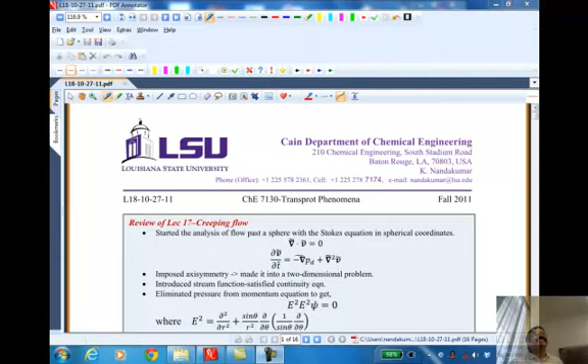So how was the last assignment? Was it brutal? Jeez. How? Is that bad? Yeah, I think we had 2 tests and I did really. I know it's no good excuse, but I couldn't think straight. Okay. How did the others feel? Was it brutal? It was trying to figure out what we needed to use. Yeah, kind of. More than anything.

It's basically what I'm trying to do, if you notice in the assignments, is make you go through the exercise that we cover in the class. The concepts are basically the same, but I switched the geometry. If we did the flat plate in the class, you do the cylindrical one. If we did the cylindrical one, you do the flat plate. Right? So the steps are basically the same, but you need to work through the math once.

I'm particularly worried about the last lecture because there was a lot of math in there. There's also another side.

Wow. Can you read that? Can somebody turn the light off? I think we should get started. Thank you. Oh, yeah, that's great.

So, I don't know, is it the comfort of having the recorded lecture? I see that there are more absences now. Some people are skipping because of a test next. Yeah. Like, they're worried about it for whatever reason and skipping the class. Don't know why. Okay. I should start, well, I mentally note down who is absent.

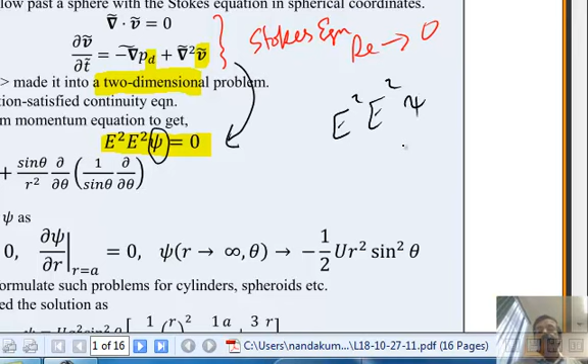So we've seen the physical meaning for the stream function, and you should know, for example, what do we mean by this E squared E squared psi? Okay, how do you calculate that? So it's basically the same operator that is defined here operated twice on that variable psi. So that gives you effectively a 4th order partial differential equation.

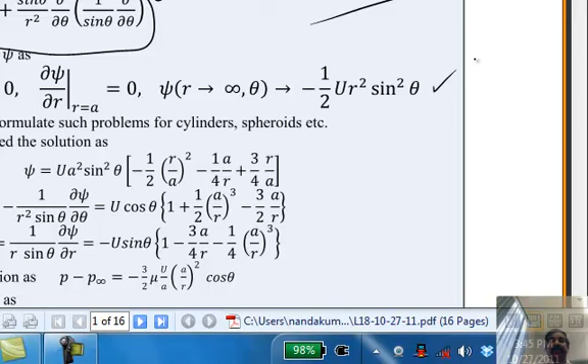And then we said we need to convert the boundary conditions from velocities into stream function. We saw how to do that at both the surface of the sphere and far away from the sphere. And in the theta direction, we really didn't worry about specifying boundary conditions because of the symmetry in the problem. So from sine squared theta, we know that it's axisymmetric, and so we can construct a solution of the form that has sine squared in it and then some unknown function in the radial position. And we solve for that unknown function and obtain this profile.

So there is again a fairly tedious step involved in getting the solution to this differential equation in this form, applying the boundary condition. Now that is a solution for psi, the stream function, but of course psi is related to the velocities by definition. So once I know psi, I can calculate Vr, which is what this is. And once I know psi, again, I can calculate V theta from that definition, and that's what that is.

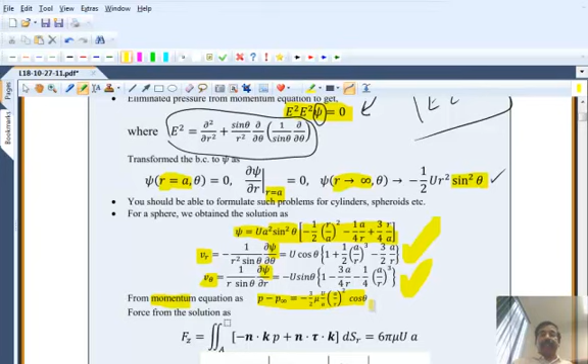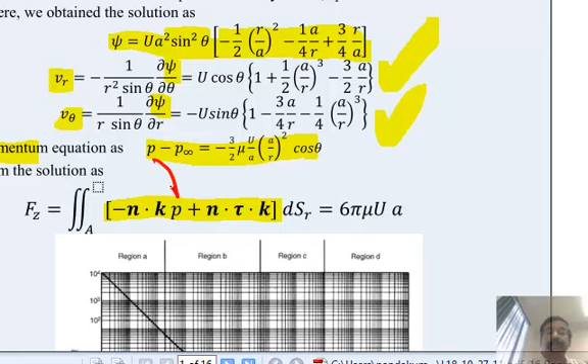Then we take these velocities and put them into the momentum equation and get the pressure profile. So this is a pressure profile over the entire domain from r equal to a to r equal to infinity, in theta direction as well. And finally, the other major step is getting the drag force by plugging in this pressure profile here and then these velocity profiles into the shear stress expression. Okay, and then dotting it with n, where n is the normal to the surface. And then dotting it with k to get the kth component, that is the component of the drag in the direction of the flow.

Okay, and that turns out to be this very familiar 6 pi mu U a. So, the next assignment that I'm going to give you is going to be something like this, which may be a fluid sphere, so that you work through all the steps. And I want you to do that. That's an opportunity for you to work through it on your own, filling in all the steps. Just replace the solid sphere with the fluid sphere. And of course, this expression will be different. It will involve the viscosities of both fluids, the fluid sphere and then the fluid that is surrounding it.

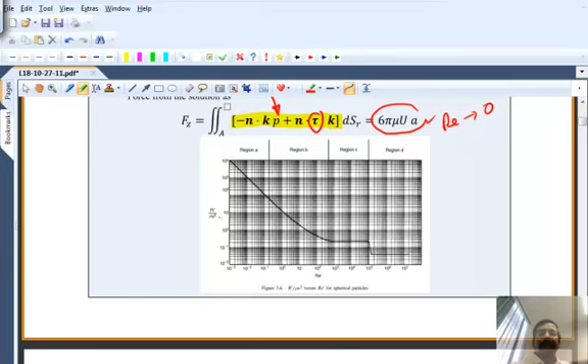Now, in the last lecture, I also pointed out that this is valid only in the limit of Re going to 0. So when you plot it as a drag coefficient against Reynolds number, you will find that the curve follows up to about a Reynolds number of 0.1. Beyond that, you will begin to see the deviation from that. The reason for that is the assumptions that we made about the solution, that it is low Reynolds number, is not valid. So by the time Reynolds number is about 1, you'll begin to see differences from this expression that CD equals 24 over Re. So what happens in reality as you increase the Reynolds number? What do you think would happen?

As I increase the Reynolds number, the inertial terms will become more important. That's a term that we have neglected from the Navier-Stokes equation. And before the days of computers, in the 50s, people have tried to develop an analytical method for getting corrections to the Stokes solution. So take Stokes solution as the basis and see whether you can find corrections to account for the effect of inertia. So we're going to look at some of those methods today. Okay, so any questions on that last lecture? I guess with an exam coming, you probably haven't had a chance to review that.

I have a question. Yeah. So when you find the stream function psi, can we apply that definition to any two-dimensional flow? Yes, any two-dimensional flow, you can define a stream function, and that will automatically satisfy the continuity equation. That is the main reason for defining the stream function, so that you don't have to worry about solving the continuity equation, because the stream function by definition will satisfy the continuity equation. So for any two-dimensional flow, you should be able to do that.

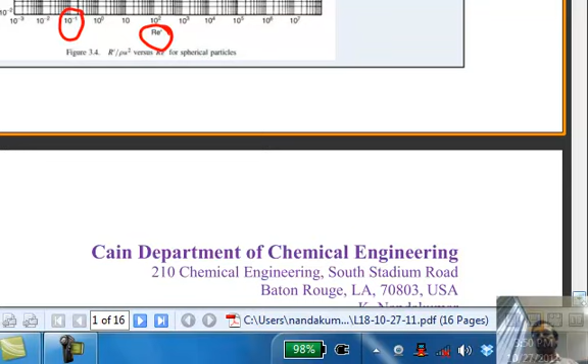Yeah. Now, the appendix in Happel and Brenner has these definitions for various coordinate systems. We have seen Cartesian and we have seen spherical. We will see today cylindrical one as well. And then there are other coordinate systems, ellipsoidal, spheroidal coordinates, and those definitions are given in Happel and Brenner. That's a good source for curvilinear coordinate systems in general, and these definitions for stream functions, stresses, surface areas, etc. Okay. Any other questions?

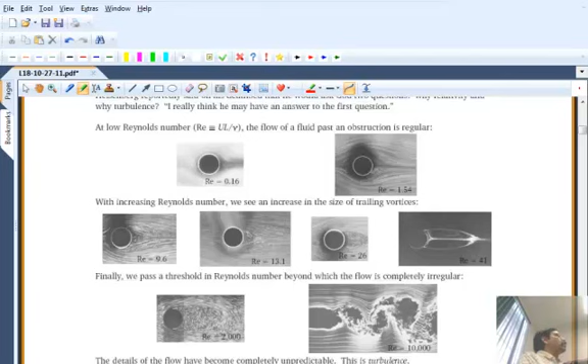So what happens as the Reynolds number increases? So this is a series of pictures that I took from a beautiful book called Album of Fluid Motion by Van Dyke, a Stanford University professor in mechanics. So he collected photographs from different researchers, and assembled it into a small book, only with pictures. And this sequence of pictures tells us what happens to the flow as we increase the Reynolds number. Okay? We are going to increase the Reynolds number by simply increasing this approach velocity U. So in the first case, you have a Reynolds number of 0.16.

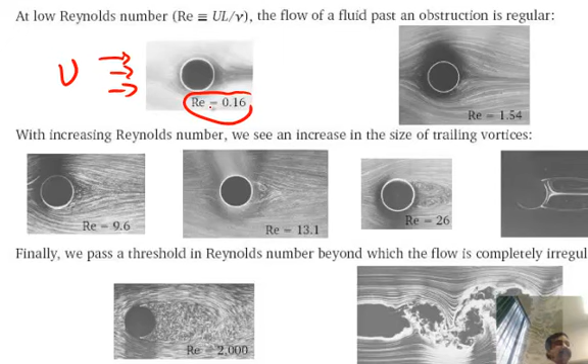And the way that we visualize these is you have a sphere that is fixed, and you have fluid that is flowing past it, and you disperse finely dispersed particles, aluminum dust, for example, 2 micron, 3 micron size, so that they don't settle out. They follow the path of the fluid pretty accurately. Then the reflected light will enable us to see. And you can see even at a Reynolds number of 1.5, the flow is pretty uniform. These are the streamlines that you would see here. Okay, and at 9.6, there you begin to see something funny happening at the back.

Okay, but clearly when you go to 26, you do see this. That's called a wake, and that means there is a recirculation there. The streamline comes and separates from the solid line. So in the previous case, if you remember, the zero streamline is this. So a streamline that is close to it will just follow the path and then come back and hug behind and then continue like this. Whereas when the inertia becomes dominant, the fluid particle that is coming around will start leaving that. So the streamline will actually be now like this.

Those are all zero streamlines. So the streamline that is slightly away just separates from the sphere. So there is a separation point that you will see here. There are two separation points in that cut. Actually, separation would be a kind of a circular projection on the rear of the sphere.

And these eddies, this particular photo is very nice at 41, stretch in length. As the inertia becomes larger, the eddy length increases. The question is, can we predict all these from the Navier-Stokes equation? Not the Stokes equation, because the Stokes equation won't be applicable for a Reynolds number of 41, but the Navier-Stokes equation. Today the answer is yes, we can just go to COMSOL and set up the problem, and it will give you exactly the same picture that you see here.

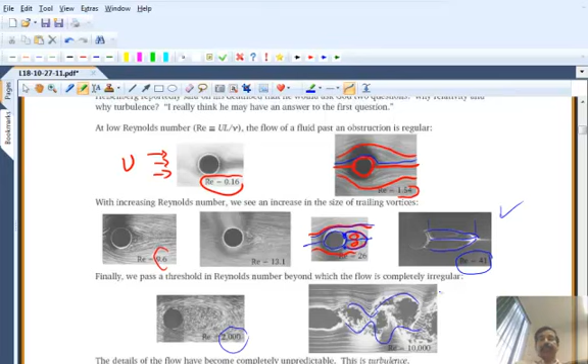And so the question is, can we try to extend the Stokes solution at least to somewhat higher values of Reynolds number? And the answer is, it's very difficult without computers. That's why computational fluid dynamics emerged as a way to address these questions, using computers to solve the Navier-Stokes equation. Yeah? In the last picture, where is this obstruction?

The obstruction here is basically the dark object that you see there. So it's some sort of an ellipsoidal object. Any object that you place in the path of a flow will cause these kinds of separations and wakes, whether it is a sphere or a cylinder or a cube or whatever. And the literature is full of these problems.

People have studied them experimentally using laser Doppler anemometers and numerically using CFD as a tool. But we are going to see analytically what happens. Next year, when I'm teaching a course on computational transport phenomena, I will emphasize more the computational parts. But here we are just looking at the analytical ways as much as possible. So I've told you what is possible with COMSOL, but we won't delve into that anymore.

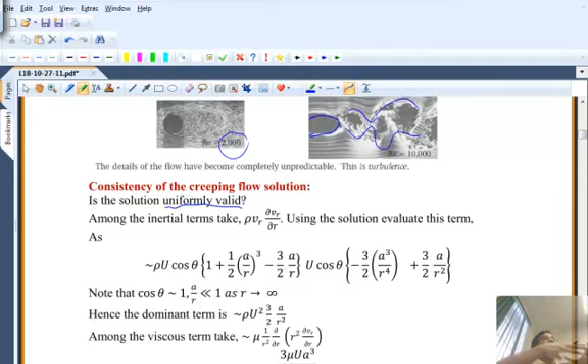So one of the first things that we need to do is examine whether this solution that we obtained, the Stokes solution, is uniformly valid. What do I mean by that? The stream function that we have, is it valid for all values of radius as you go far away from the surface of the sphere? Now, there is the film by G.I. Taylor. I don't know how many of you have not yet seen it, but I cut a clip out of it that deals with this.

In the next experiments, we will look at the resistance of solid bodies at low Reynolds numbers. Two brass spheres in syrup. They have diameters in the ratio of 2 to 1. We'll release one now and the other later.

What do you think would happen in this experiment? This is the Stokes drag. This is low Reynolds number flow, there is no wake, and the two spheres are settling.

When the smaller ball has one more unit to go, the larger one is released. They reach the bottom mark at the same time.

Why? Terminal velocity. Terminal velocity. What about the terminal velocity? Acceleration becomes zero. Velocity is constant. Right. So both of them reach a terminal settling velocity very quickly, within a microsecond of the time that you release. Initially, you are holding them. When you release at time t equal to 0, within a microsecond they reach a terminal settling velocity, and then settle at the terminal settling velocity throughout.

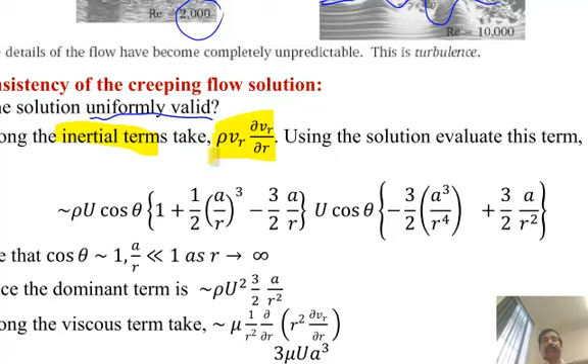But the way that we are going to analyze is the following. It's a very ad hoc hand-waving argument. I'm going to take a typical inertial term from the left-hand side of the Navier-Stokes equation. There are many terms. There are 3 equations. Each equation has several terms. But I'm just going to take one term, rho times VR dVR/dr. And I know already what VR is. I know the solution, so I can plug that solution in, which is what I have done here. This one is basically that term. And similarly, dVR, after you take the derivative, you get this one.

So you're just plugging in the velocities, taking the derivatives, and since it's an order of magnitude analysis, we are going to ask which is the dominant inertial term. The inertial term obviously has products of several things. For example, it's a product of 1 plus 1/2 (a/r) cubed minus 3/2 (a/r) times these. So if you take a over r, what happens as r goes to infinity to that term? It goes to 0, but it goes to 0 very rapidly because it is cubed. And if you take r to the power 4, that will go to 0 even faster.

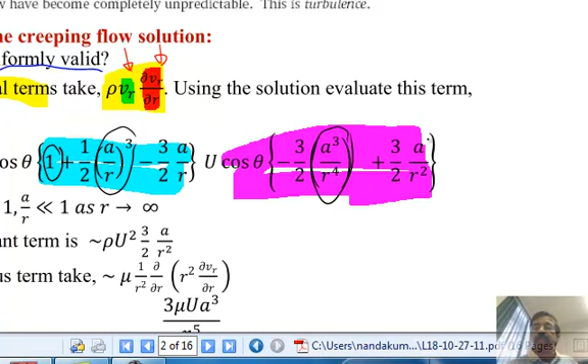Those terms that go to 0, we don't worry about because they don't contribute anything to the stream function. So we want to see which is the term that is decaying the slowest of all the terms that we have, and that turns out to be the product of 1 with 3/2 (a/r) squared, because 1 with (a/r) to the power 4 will go to 0 very quickly. So that combination is the slowest of all the terms. Other terms will go to 0 faster. So that is the term that we keep, just an order of magnitude. So that is the dominant inertial term, and we're going to do the same thing for the viscous term.

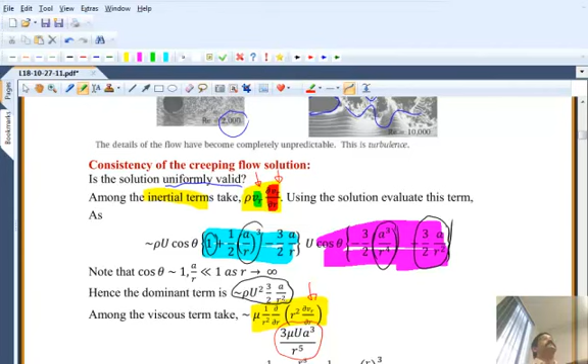So select a typical viscous term and plug in the velocity field that you have, Vr, take the derivative, and what you get is a typical viscous term which goes as 1 over r to the power 5, whereas the inertial term goes as 1 over r squared. So does the inertial term go to 0 first, or the viscous term? The viscous term will go to 0 first, right?

So when you take the ratio of these two terms, the inertial term to the viscous term, there is a ratio of this expression to this expression. And you can rearrange that as Reynolds number times (r/a) to the power 3. So it actually is not going to 0. As r goes to infinity, even though you may have a very low Reynolds number situation, even if you take Reynolds number as 0.001, as you go far away from the sphere, this goes to infinity.

So the solution, we say, is not uniformly valid. The solution is good near the sphere. The solution is not good far away from the sphere. And the reason why the drag force, 6 pi mu U a, agrees well with experimental measurements is because it depends only on the gradients on the surface of the sphere.

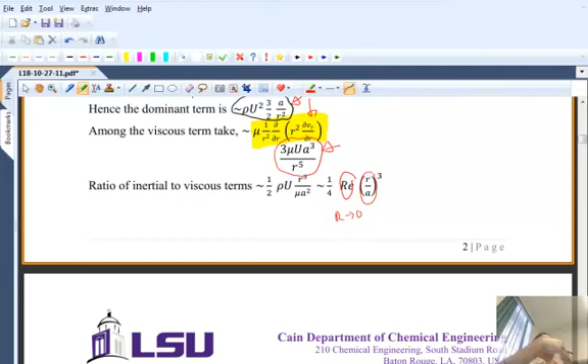So our solution near the sphere is fine, but far away from the sphere is not fine. And this idea gave rise to the need to construct solutions in two domains: one solution that is valid close to the sphere, and another solution that is valid far away from the sphere, and then you match the two. So this method is called the matched asymptotic expansion.

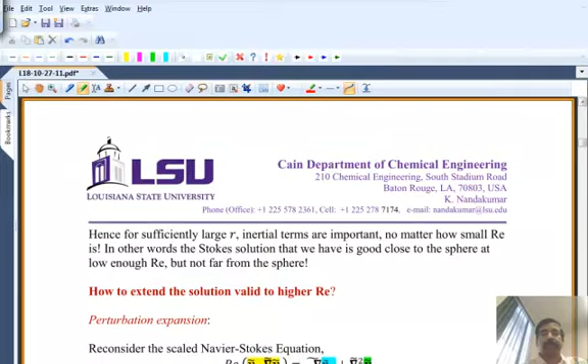We are not going to do that because the math involved is quite tedious for us to deal with in this course. Okay. The other approach, well, this is one of the approaches, is called the perturbation expansion. This idea is fairly simple and very interesting because it's applicable for a number of other problems in reaction engineering, in heat and mass transfer as well.

So the objective here is to extend the solution to higher Reynolds number. Okay, and how do we do that? We do that by breaking up the problem into a series of simpler problems that we can solve that are valid for progressively higher and higher Reynolds number.

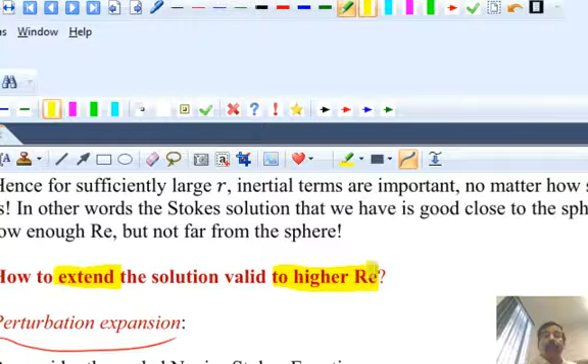So we go back to the full Navier-Stokes equation now, not the Stokes equation, because we know that we cannot drop the RE term out. If we drop the RE term out, the solution we get is valid only up to 0.1 Reynolds number. We want to improve that. Okay, so we need to keep that. But if we need to keep that, we cannot solve it analytically because we have a nonlinear term, the product of V here. Okay, so this technique of perturbation expansion linearizes the problem as a sequence of linear problems.

The idea is very simple. We are going to construct the total solution V tilde as a sum of many different solutions. The first solution is superscript V0. The second solution is V1. Now V0 is a function of r and theta. V0 contains two velocity components. Okay, and similarly V2. So these are all unknown functions, vector functions, functions of r and theta.

But they are multiplied progressively by RE, RE square, etc. Those are Reynolds number parameters we know. We know the numbers. Okay, and we do the same thing for pressure. So the lowest order pressure solution is P0, the first order solution P1, the second order solution P2, but they get multiplied by RE square.

So this sequence obviously is converging as RE goes to 0, right? As RE goes to 0, what can you say about the magnitude of this term compared to the magnitude of this term? The RE square term should be smaller as Reynolds number is small. But if you go to very large Reynolds number, this will break down because the series will be divergent. Okay, so any questions on that?

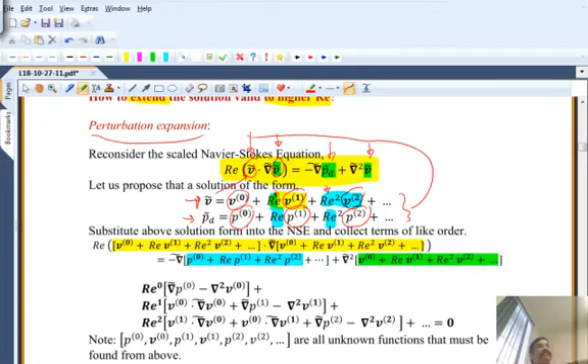So that is a conjecture that we can construct a solution to the total velocity and pressure field as a series solution in a perturbation parameter. The parameter that we are perturbing here is the Reynolds number. Okay, so we take these definitions and plug them into the Navier-Stokes equation for pressure and for velocity. So these things are fed in there, both the pressure and velocity expressions. And I have shown you how it looks in the next line.

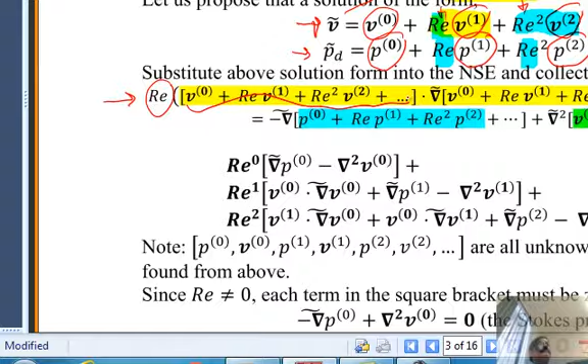So on the left hand side we already have an RE, that RE survives, and then we have a V. I replace that V by the series expansion, and then I have a dot product. The dot product stays as a dot product, and then I have a del operator operating once again on V. That series expansion is plugged in again for the V. On the right hand side you have minus gradient of P. This series expansion is plugged in for that P. Plus del square, and then that series expansion for V once again. So we have an equation that is in terms of a series expansion. It is a full Navier-Stokes equation.

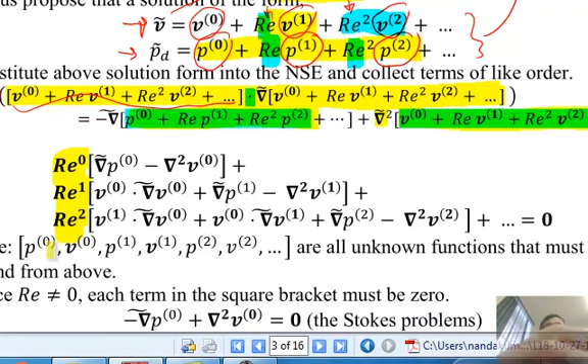Next thing that we do is we collect terms of like order, that is order of RE to the power 0, RE to the power 1, RE to the power 2. Collect those terms from the series expansion. So for example, if you take RE to the power 0, do we have any contribution from the left hand side? The left hand side is this entire term, the product.

Okay, when you expand that, what you would have to do would be take V0 dot del V0, V0 dot del V1, V0 dot del V2, etc. But then you'll also get the first term RE, the second term RE square, the third term RE cube. And then you have to do the same thing with RE V1: V1 with del V0, V1 with del V1, etc. So this is going to be a very long expression. But what we are going to do is collect terms that have the same exponent of the Reynolds number and group them together. So these are all grouped terms from that series, with a dot dot dot to indicate that there are even more terms in the series.

Is that idea clear? That is the central idea of a perturbation series expansion. We can propose a solution as a series expansion in terms of a perturbation parameter, in this case the Reynolds number. Take that proposed solution, put it into your original equation, and separate the terms according to like powers of RE: to the power 0, 1, etc.

So in the very first term, none of the terms from the left hand side will contribute. But on the right hand side, you have del P0 and del square V0. None of them have Reynolds number in it. RE to the power 0 is 1; there is no Reynolds number in there. That's how you get these two terms. Is that clear?

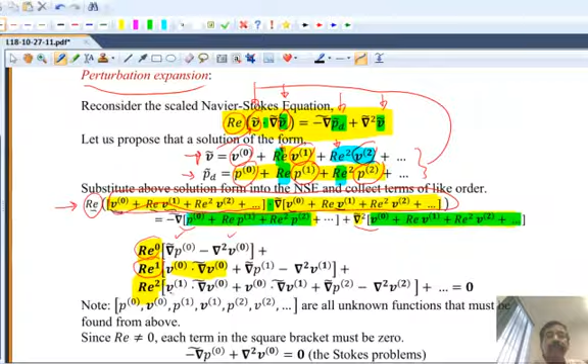And you need to do the same thing for RE square. It gets a bit more complicated. When you go to RE square, what happens? You will have RE here multiplied by another RE, so that term could survive. That is V1 with V0 or V0 with V1; both of them will give you RE square. But V1 with V1 will give you an RE to the power 3 term, which will appear in the next expression. So the only thing that appears is V1 del V0 or V0 del V1.

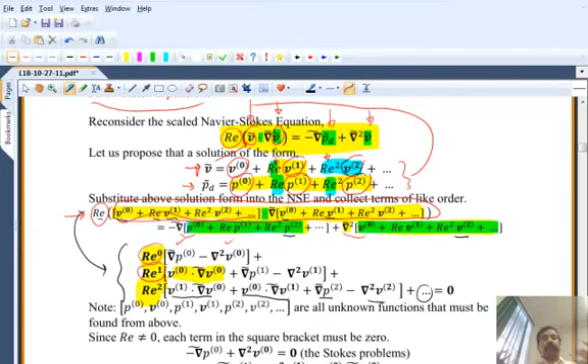On the right hand side, you will have P2 and V2, so del P2 and del square V2. And the series continues; the dot dot dot means it's an infinite series. That is equal to 0. If you understand from this step to this step, you have basically understood the idea of a regular perturbation expansion. Now, P0, V0, P1, V1, P2, V2 are all unknown functions, but we are going to derive equations for them.

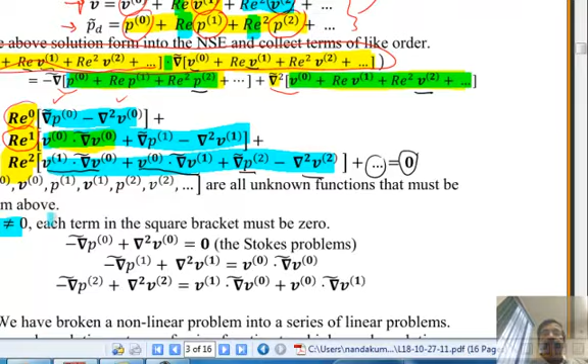The argument is, this must equal 0, but Reynolds number is not equal to 0, right? So the terms in the parentheses, like this term, or this term, or this term, each one must be equal to 0. That gives you these equations. Since RE is not equal to 0, each term in square brackets must be 0. So from the first expression, you get this equal to 0 as an equation, which we recognize as the Stokes equation. We have already solved it; we already know P0 and V0.

So the next term will have P1 and V1, but V0 I move to the right hand side. Why? Because by the time I come to solve for P1, V1, I have already solved for V0 and P0. So the right hand side is a known quantity from the previous solution. The nice thing is the previous solutions feed into the next solution, so I can construct this in an iterative way.

And the same thing for the third term: P2 and V2 are unknowns, I keep them on the left hand side, and I move V1 dot del V0 plus V0 dot del V1 to the right hand side. By the time I come to solve for P2 and V2, I would already know V1 and V0 from the previous two steps. Okay, let me ask you a question now. What have I done in breaking down the problem this way?

I have linearized a nonlinear problem. Okay, so at this stage, when I had the full Navier-Stokes equation, I had a nonlinear problem in here. So if you look at the series of problems, I have not one problem now, I have a series of problems that you need to solve. But on the left hand side, they all have the same operator: del P0, del square V0, del P1, del square V1, del P2, del square V2.

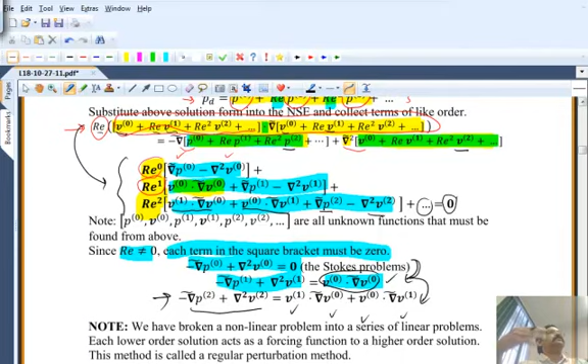Okay, and this process can be automated with symbolic processing tools like Maple. So that's why this became very popular in the mid-70s. Van Dyke again published a series of papers where he showed that automated algebra programs can solve these analytical things up to 20, 30 terms. But there were other mathematical challenges that came out from extending the series to that level. There are some singularities in the solution that he needed to take care of.

So once the computers came in with CFD, these methods kind of went away. But still, the basic solution gives us an insight that cannot be obtained from a computer solution. Any questions on that? Yeah. How did you do that series expansion?

That's a good question. How did I write this part? That's what your question is. I just wrote that. The real answer is there is no unique way to write that. Here, because Reynolds number is the parameter, and Reynolds number is a small parameter, by writing it as Re, Re squared in a naive way, just a series expansion, I'm proposing that as a solution. I can certainly find P0, V0, P1, V1, P2, V2 that will satisfy that series.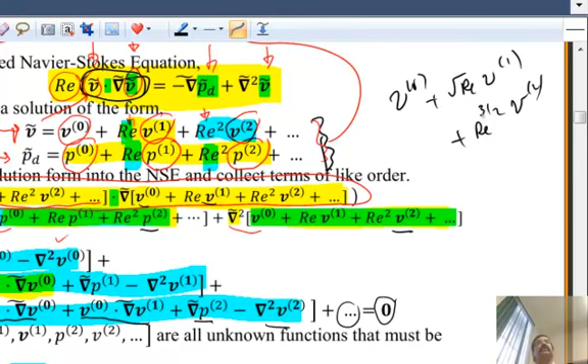The other way to ask the question is: is there another series that I can write and find a solution? Why can't I write, for example, V0 plus square root of Re V1 plus Re to the power 3 over 2 V2, etc.? There is no uniqueness to this process. That's a very good observation. So there is a degree of arbitrariness in the way that I write the series expansion. It comes from a certain expectation about the parameter.

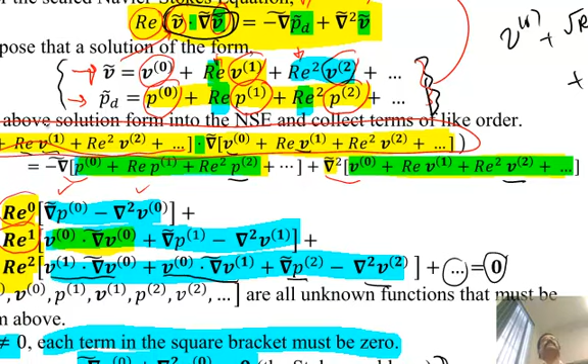You typically do the expansion in a parameter that is small, and then typically you just use an algebraic expansion like that. But unless you know something more, like in boundary layers, for example, you know the boundary layer thickness goes as 1 over square root of Reynolds number. Then you might use that information in constructing your series. And V0 you get from the Stokes? Yeah, so V0 is the Stokes solution. We already have solved for it.

So if you want to solve for the next one, you take that, evaluate the right-hand side, plug it in, and then you can solve the next one. It turns out that with this regular series expansion, when you solve for the next one, you cannot satisfy the boundary conditions. You don't get a solution because of this lack of uniform validity. The solution for V0 is not uniformly valid over the entire domain. So that error creeps into the P1, V1 solution, and the method breaks down for a sphere. But the method has been applied for other shapes, like cylinders. Did you have a question?

Yes. You said this perturbation is good for the small parameter Reynolds number here. Is this necessarily valid for large Reynolds number? Well, if you are looking for a series solution at large Reynolds number, you can always redefine the problem with another parameter, epsilon, which is 1 over Re. So as Re becomes large, epsilon goes to a small value. Then you can construct a series expansion in terms of epsilon. Right? Yeah, it's a good question.

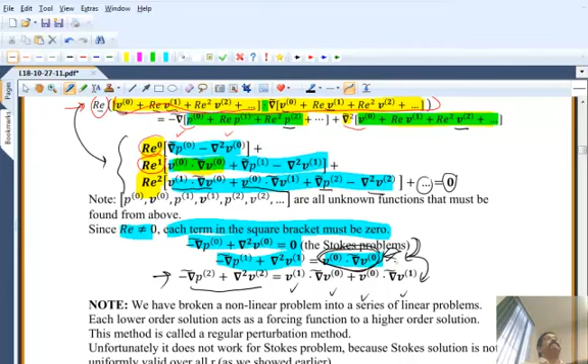So that's just the idea. It's not in your textbook, but there is a book by Morton Denn, Process Fluid Mechanics, where the series expansion method is introduced.

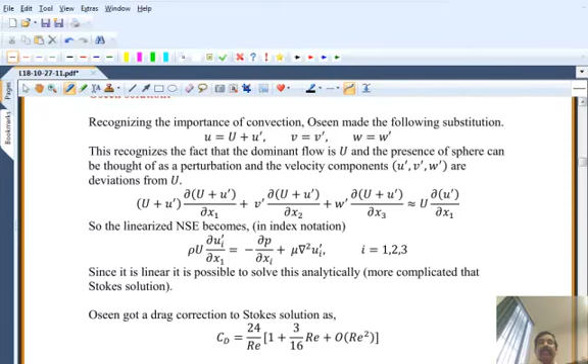Another way of linearizing: the thing is, analytically we can solve only when the problem is linear. So all these methods are ways of linearizing the problem. The first one that I presented is just a strict mathematical series expansion. The other one uses physical intuition to carry out the same linearization, and it was done by Oseen. You will see this name quite often if you work in the fluid mechanics area. It's called the Oseen solution.

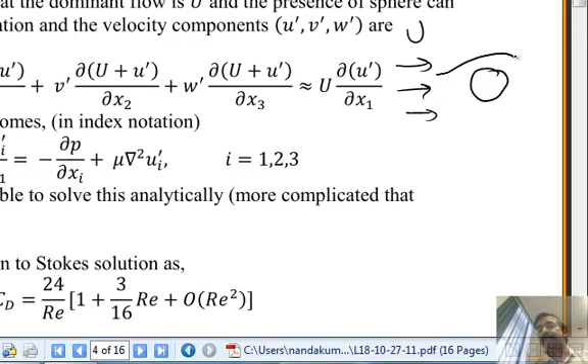The basic idea here is the following. I have a sphere, and I have a free stream U that is approaching. This velocity is deflected by the presence of the sphere. The departure from this is going to be small compared to the mean field velocity. So I can split my velocity component into two parts: one is the free stream velocity, the other one is a small deviation from that, caused by the presence of the sphere. If the sphere is not there, the deviation will be 0. So these deviations are considered to be small.

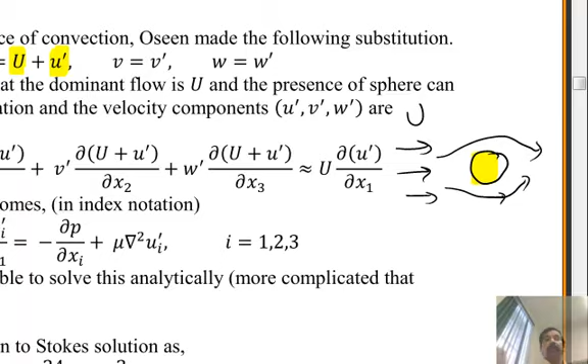That's in the u direction. In the v direction, there is no main component of the velocity, so v prime is only because the sphere is there. Its presence creates these disturbances. So we call these disturbances u prime, v prime, w prime. If you take the sphere out, the velocity field is going to be only U, the free stream velocity. And he took these definitions and put them into the Navier-Stokes equation.

So I'm showing you here the x1 component of it in the Cartesian frame. Remember we have this term v dot del v. When you expand that, using u, v, w, you're going to get u du/dx1 plus v du/dx2 plus w du/dx3. That's what that expansion will result in for the x1 component.

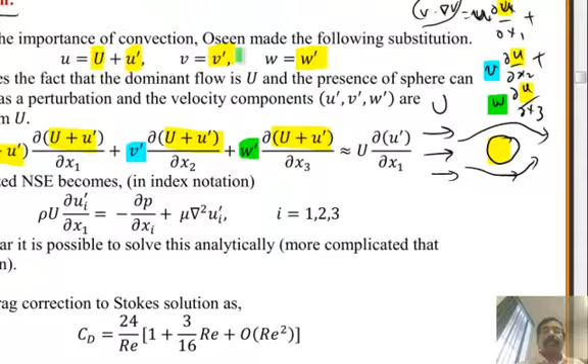So wherever I have u, I substitute U plus u prime. Wherever I have v, I put v prime, because v is v prime. And wherever I have w, I put w prime. Then I use the argument that a product of two small numbers is going to be smaller than the individual numbers. v prime, w prime, u prime are deviations from the main velocity, treated as small numbers. So any product, for example v prime with u prime, or w prime with u prime, I'm going to neglect. That is a linearization process.

The other thing you need to notice is U is not a function of x3, so that drops out. U is not a function of x2, and U is a constant, right? U is not a function of x1 either, so that drops out. Now, I cancel here u prime and u prime, but what I cannot cancel is U with u prime. So that is the only term that survives: U on the outside, d/dx1 of u prime. That is the only non-zero term from that expansion by this linearization.

How did I achieve the linearization? I neglected the quadratic terms, because they are products of small numbers. So U is a constant in here; that's what linearizes it. Previously, I had v1 dv1/dx1. I basically replaced that by U dv1/dx1. This is now a known velocity field, a constant number, so that equation becomes linear. So he linearized the Navier-Stokes equation and obtained this equation in index notation.

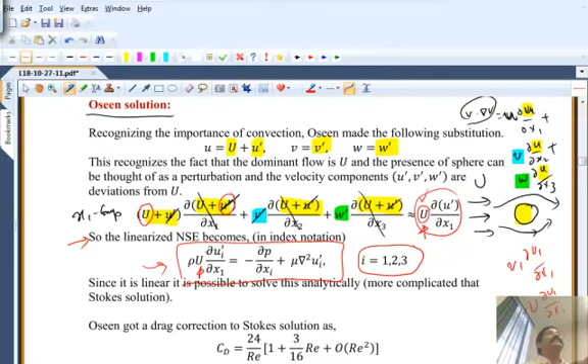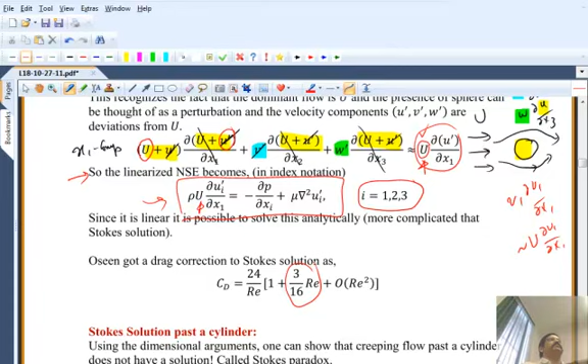But what he obtained was this correction, 3 over 16 times Re. It turns out this is not a very good correction, because it increases the validity from 0.1 to maybe 1. If the Reynolds number is higher, the other terms are still important, so you cannot ignore them.

Any questions on that? So the idea of the Oseen linearization is to assume that the mean velocity U is the dominant one, and u prime, v prime, w prime are treated as perturbations from that mean velocity. Because they are small, all the products drop out in the Navier-Stokes equation, and that gives you a linearized inertial term. So we are still keeping the inertial term, only the dominant one.

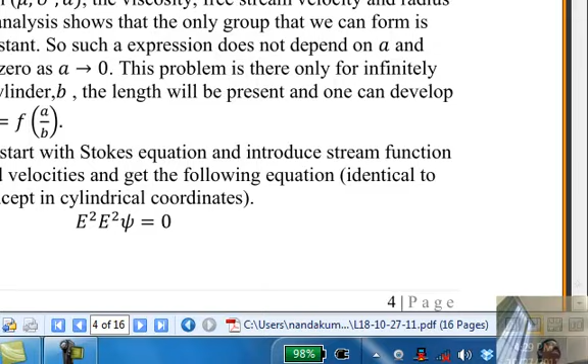Now, the next thing that we need to ask ourselves is, okay, we've spent a lot of time obtaining the solution for a sphere. Can we do that for a cylinder? Okay, so if I have a cylinder and a flow past it, how does the problem change?

The symmetry is different. Previously, we had axisymmetry, right? Here we have a symmetry in the axis direction. So we still make it two-dimensional. We still have the r theta coordinate, but we have a z coordinate. Okay, so this is x, y, z. Along the z axis, there is no change. So we are making it into a two-dimensional problem.

Now, this problem also has a very rich literature. There are probably thousands of papers on this. It turns out that when Stokes tried to solve this problem, there was no solution to the Stokes equation. If you take the Stokes equation and try to solve this, and I will show you why, there is no solution, and that is called the Stokes paradox.

Okay. Now, there is a dimensional argument that people have used since then to explain why that is. For example, in a 2D flow, you can ask the question, what is the force F? Force per unit length, because this is an infinitely long cylinder, so you need to talk of a force per unit length of an infinitely long cylinder. Okay, so what does that force depend on? It obviously depends on the radius of the cylinder, depends on the approach velocity of the fluid, and it depends on the viscosity of the fluid.

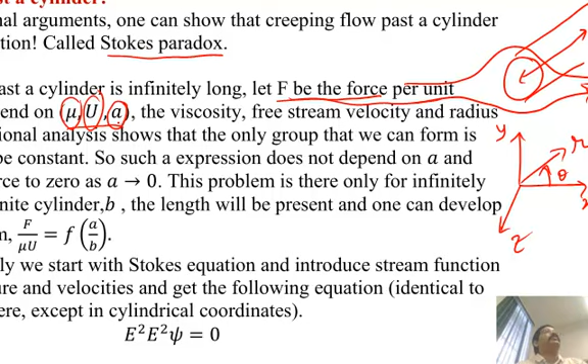So if you do a dimensional analysis to form a dimensionless group out of this, using Buckingham Pi theorem, turns out that this is the only dimensionless group that you can form, F divided by mu u. That says that must be a constant, because there is no other dimensionless group I can relate that to. So that means that F divided by mu u must be constant. It must be independent of A. That means no matter what is the diameter of the cylinder, I will have the same force.

And that is not true. That's not intuitively true. That's not true as we can get from the solution as well. So the problem manifests itself even in simple dimensional argument when we try to put these variables into dimensionless groups, and we find with this contradiction that F over mu u, the dimensionless group, must be a constant when we know that it is not.

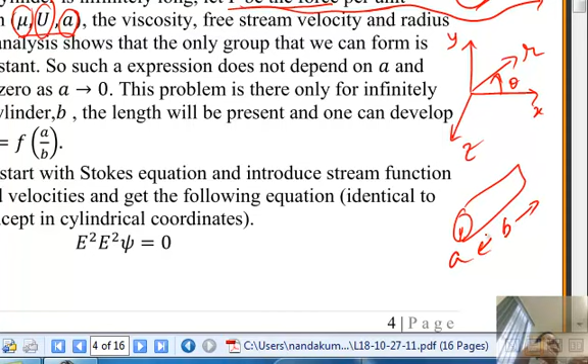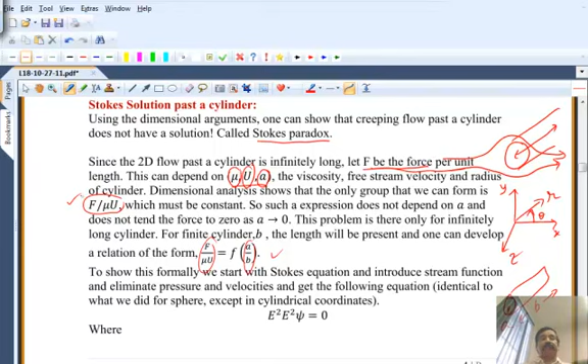Now, if you introduce a finite length to the cylinder, so the radius is A and the length is B, then you have another dimensionless variable, which is A over B, the ratio of the diameter to the cylinder length. That means this can be some function of that. So as you change the length or the diameter, the drag force will change. So that problem has a valid solution, but this problem of an infinitely long cylinder does not have a valid solution, and that is called the Stokes paradox.

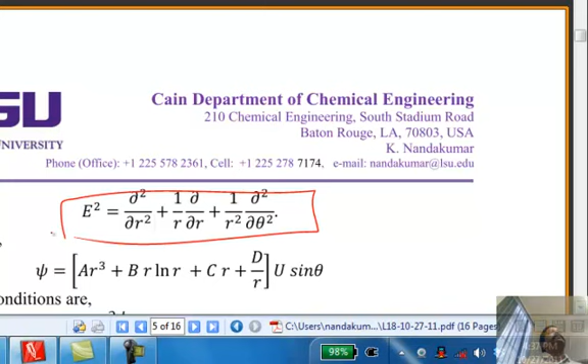Why is that? We can solve the same equation, the Stokes equation, but this time this E square has to be expanded in cylindrical coordinates. And the book by Bird, Stewart, and Lightfoot gives you the expansion for E square in cylindrical coordinates. Previously we saw it in spherical coordinates. So take that and go through exactly the same process that we did in the class. So propose a solution of the form that has sine theta now, because what you need to do is resolve the far stream boundary condition u in terms of ur and u theta in cylindrical coordinates.

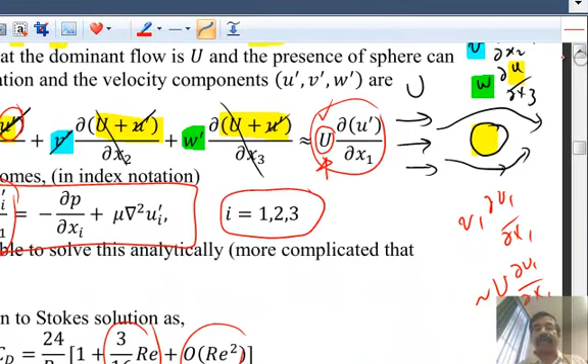And you will find that this is again a good exercise to reinforce the mathematical steps involved. I'm just giving you a very quick overview of how this is done. So the starting point of the equation is the same, but in cylindrical coordinates. And that's given in Bird, Stewart, and Lightfoot. And then you need to construct the boundary conditions on the cylinder and far away from the cylinder. Those are the useful exercises that you can do on your own.

But when you go through this, you get a solution for stream function for flow past a cylinder that has this form. Of course, in cylindrical coordinates, you always get a log r term somewhere, right? So you have A r cubed plus B r log r plus C r plus D over r. So there are 4 integration constants. And the boundary conditions turn out to be: far stream is u r sine theta, on the surface stream function is 0, the derivative of the stream function is 0. But the problem is the far stream condition, as r goes to infinity, dictates that this term should be 0, because this goes as r cubed. We cannot have that because we know that it goes only as r.

So that determines, in fact, C must be equal to u. Then it matches with r. But this term r log r also goes to infinity at a much faster rate than r. So we cannot have that too. So we must have A equal to 0, B equal to 0, and C equal to u. So from that one condition, far stream condition, we have determined 3 constants. We still have 2 conditions to satisfy, and we have only 1 constant. So there is no way that we can satisfy that.

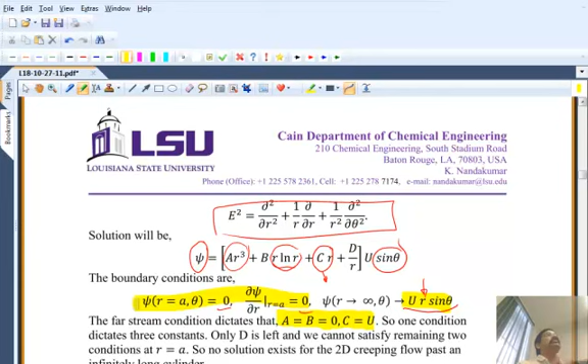And that means that there is no solution, there is no function for psi that will satisfy the differential equation and all the boundary conditions. That means that there is no solution for that particular problem, only for the creeping flow limit. Once you put in the inertial term, the problem will go away. So this is called the Stokes paradox, that for cylindrical flow, there is no Stokes solution. Any questions?

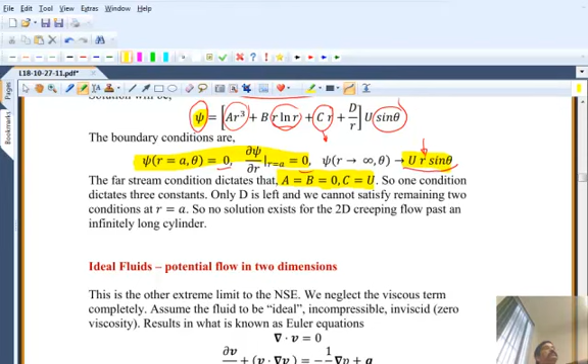Is there a way to solve it for cylindrical without using the E squared like he uses? Good question.

There is no way. The answer is there is no way. Whatever variable that you solve for, you will get into a problem one way or the other. What are the other choices? The other choice is you can try to solve it in terms of VR, V theta, and P. We have the 3 equations, continuity and 2 momentum equations. You can try to solve for them directly in terms of those velocities.

And you will get into this problem of not being able to satisfy all those 3 equations and all the boundary conditions. So the problem does not manifest just because we transform the variable into psi. The problem is fundamental to this particular situation. And that comes out when you do the dimensional analysis also. Already there is a clue from the dimensional analysis that there is no way that you can have F over mu a to be equal to a constant.

Now, a whole course can be taught on solution to this Stokes equation. And there are 2 very good books, Happel and Brenner and Kim and Karrila, I think. But we are going to just end there because we have seen what Stokes flow is, and it's typically valid in low Reynolds number flow, but there are a lot of situations where we do have low Reynolds number flow. Particularly these days, microfluidics is a very dominant field where we try to devise entire lab on a chip analytical techniques on microchips that are etched with channels that are micron sized, 30 micron, 40 micron size.

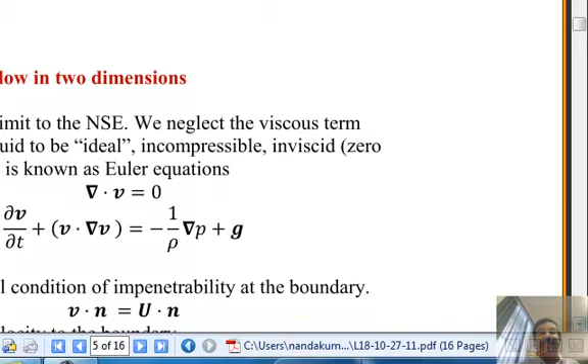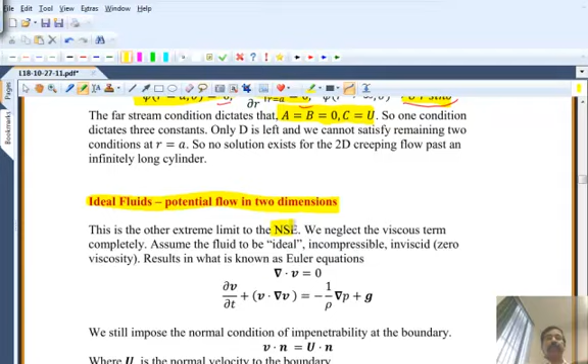Now, ideal fluids or potential flow in 2 dimensions is about the other extreme, very large Reynolds numbers. And again, the Navier-Stokes equation is the starting point, but we assume the fluid to be ideal. What does that mean? Ideal means it has no viscosity, no friction. It will just slip by any solid surface. So its viscosity is 0, and you will see on the right hand side, the viscous term is dropped out. What we should have added is mu times del square V, but we just dropped that out.

And there are many names by which it goes. Ideal is one, inviscid is another one. 0 viscosity, inviscid fluid. So this viscous term is set to 0. And that equation is called the Euler equation. They are all derived from the Navier-Stokes equation. The Stokes equation, the Oseen equation, the Euler equation, and then we will see the Prandtl boundary layer equations. They are all subsets of the Navier-Stokes equation, valid in different domains. So in this case, this is valid in the domain of Re going to infinity.

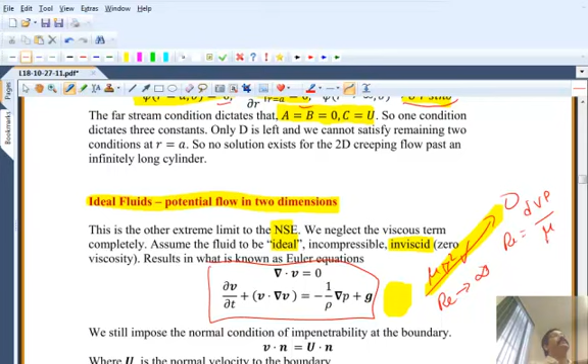Why do we say that? Because Re is dV rho over mu. But I've said mu goes to 0. Viscosity goes to 0. It's an ideal fluid, 0 viscosity fluid. So when mu goes to 0, Reynolds number must go to infinity. So we are approaching the problem from the other end. Now, when you have that, can I impose the no-slip condition?

We cannot. No-slip condition is a consequence of viscosity, friction, where if the solid is stationary, fluid next to it must stick to it. It must also be stationary. Okay? But with the ideal fluid assumption, that's not possible. So we have to give up on the no-slip condition.

But we can still impose this condition, which says that the normal velocity to a solid wall is 0. That is impenetrable. You can have an ideal fluid that can slip past, but it cannot penetrate the solid. Okay? So u is the velocity of the solid. Take its normal component and set that equal to the normal component of the fluid velocity. So the right hand side here is the solid velocity, and the left hand side is the fluid velocity.

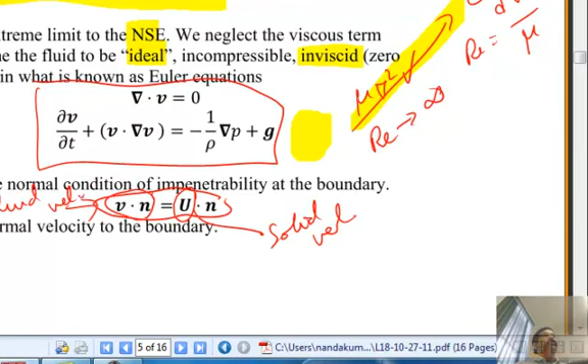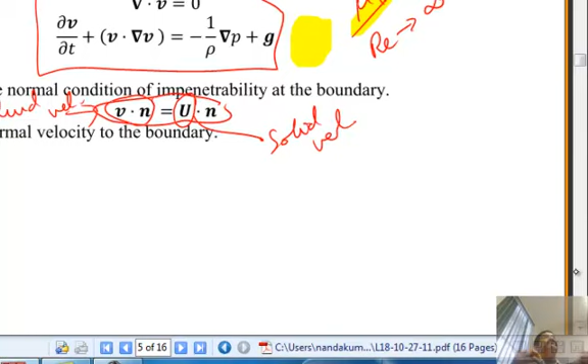So they must be continuous. If the solid is moving, fluid should move with the same normal velocity. Or if u is 0, the solid is stationary, then the normal velocity must be equal to 0. So the solution to that is again a whole course, and there are books on the ideal potential flow. Okay, but we just want to learn the techniques for solving two-dimensional potential flows.

Potential flows particularly have been very successfully used in aerodynamic design, okay, because they cannot predict shear because there is no shear, so they cannot predict the drag, but they can predict the pressure profile around objects fairly accurately, and we need to understand the reason why it predicts the pressure but not the velocity, and the boundary layer theory will tell us why that is.

Okay, so in calculating lift forces, all we need is the pressure distribution around an object, and you resolve it in the vertical direction, and if there is an imbalance in the pressure between the top and the bottom surface, that's your lift force. So in aerodynamics, in optimization of the shapes of aerofoils, for example, potential flow is used very well. And people have measured the pressure profile on various aerodynamic objects and then compared it with a solution to the Euler equation. Okay, and they agree quite well. So that's one of the motivations.

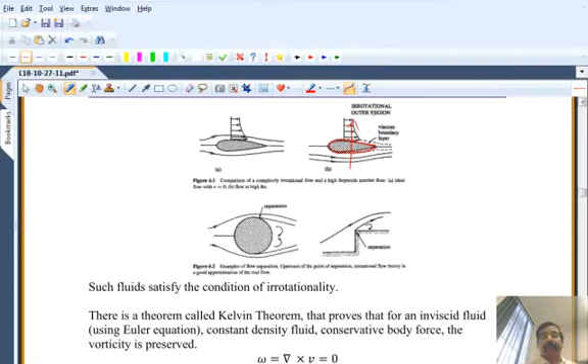Yeah. So because here we assume the fluid to be ideal, there's no stress. But in reality, does the stress contribute to the lift force? No. There is a small contribution from terms like tau xx or tau rr, right? But the dominant term turns out to be the pressure, because when you see the T, it is minus IP plus tau, right? So the total stress depends both on the pressure and the shear. Here we have thrown this out.

So the question you can ask is, does that introduce errors in the lift force calculation? And that turns out to be very small. There is an error, but it turned out to be very small, only when you are considering the pressure profile. Okay, the pressure profile is accurate, so the lift force that you will calculate from the pressure profile is very close to what you will see for real fluids. But the drag is not predictable at all, so you need to go and solve the full equation to predict the drag. That's where the boundary layer theory comes in. Good observation.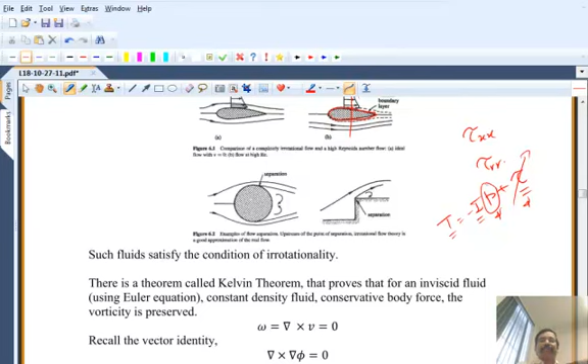Okay, now what we are going to do is I'm going to give you a theorem. It's called the Kelvin's theorem, without proving it. And it is derived for an inviscid fluid, using the Euler equation. So if you apply the Kelvin's theorem, that means you are automatically satisfying the momentum equation, the Euler equations, and that says basically that the vorticity is conserved. Remember, we introduced vorticity, and what is vorticity? It's a measure of rotation of the fluid. So that vorticity is conserved.

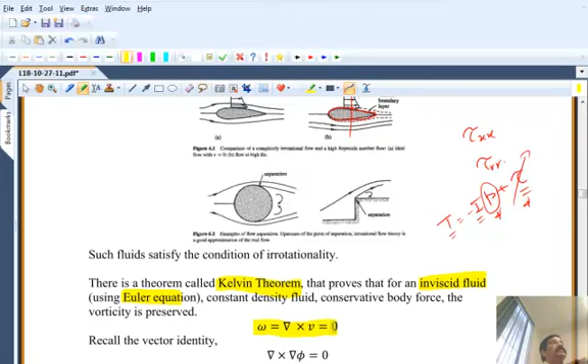What does it mean? Let's do a thought experiment. This is going to be a bit difficult for you to imagine, because I'm asking you to imagine with an idealized fluid. Suppose I have a beaker, and I have a fluid in there, a real fluid, water, and I give you a spoon, and I say, get a vortex in there. What will you do? You will just put the spoon there and stir it, and it forms a vortex. Okay.

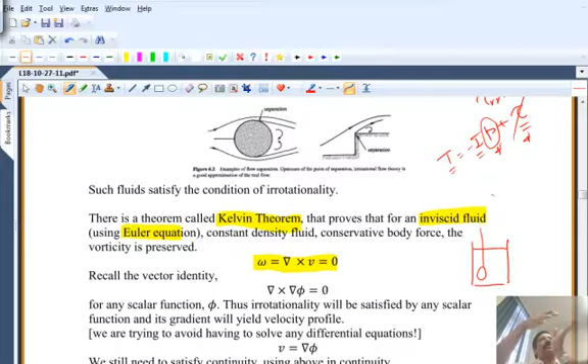I don't give you a spoon, but I give you a curved part of a cylindrical shape, something like this, and I say insert that, and you can spin it in the radial direction. Will that create a fluid motion if it is an idealized fluid, or if it is a real fluid? Two cases. Are you following what I'm trying to say?

With a spoon, it's very easy. The real water, I can spin it and I can create a vortex. Now I'm asking you to stretch your imagination to the situation of an ideal fluid, which has no viscosity. And if I give you a spoon, can you get that fluid into motion, into circulation?

You can if you keep the spoon perpendicular to your motion, because you can always apply a pressure, right? So this is going to be difficult for me to explain. Imagine you have a beaker, right? And in the beaker, you're putting a spoon that is kind of aligned in the radial direction, and then you're moving it in the angular direction. So you're applying a pressure. The fluid has to move.

Okay, so that will create a vortex. Now, if you are an ideal fluid, I take the spoon. Will it ever come to rest? It will not. Because once you impart the angular momentum, there is no dissipation mechanism. Right? There is no viscosity for an ideal fluid. So it will just keep on spinning forever. And in fact, that is the thing that is captured by this Kelvin's theorem, that the vorticity is conserved. Once you give it a spin, the spin is conserved forever. There is no dissipation mechanism.

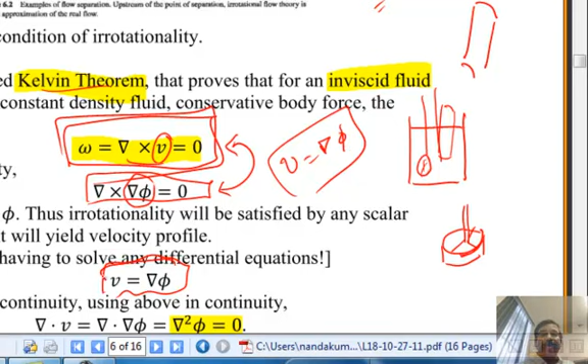So I'm defining a potential function phi. Phi is called the potential function, and it's a scalar function. Just like stream function was a scalar function, potential function is a scalar function. And the gradient of the potential function gives you the velocity, and by definition, because the del cross V must be equal to 0, it will always be satisfied according to this vector identity.

Remember, we said that using Kelvin's theorem is equivalent to satisfying the Euler equation. So the momentum equation is satisfied, but we still need to satisfy the continuity equation. So we take this definition for V in terms of the gradient of phi and put it into the continuity equation, the continuity equation for an incompressible fluid. Okay, so that is del dot V. So substitute for V by the definition del phi. So you get del dot del phi, and that is the same as del square phi.

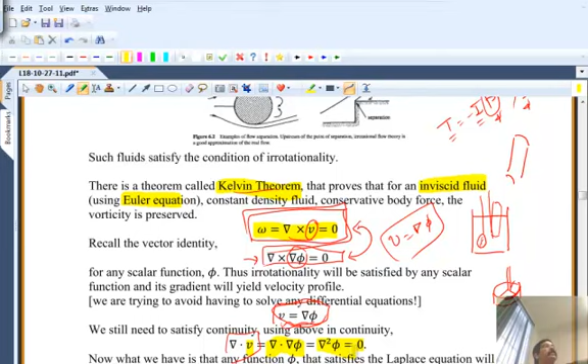Okay, so these are just mathematical operations, but we need to step back and see what have we achieved here. We started solving the problem with large Reynolds number limit. We threw out the viscous term, and we ended up with Euler equation. And we said the Kelvin's theorem tells us by solving the Euler equation that the vorticity is conserved. So the vorticity del cross V is equal to 0.

Then using the vector identity, we say, wow, if that is true, I can always get a velocity field from gradient of some potential function. I don't know what that function is, just like stream function. I can solve for it later, but for now all I know is that such a function exists, and when I take its gradient, it will give me the velocity, and it will automatically satisfy the Kelvin's theorem. It will automatically satisfy the irrotationality condition.

Then I take the same velocity field and plug it into the continuity. I get now del square phi equal to 0. So I would have satisfied my continuity, I would have satisfied my Euler equation. But what I need to do is answer the question, what is that phi? Because I just said phi is some function, the gradient of which gives me the velocity, and it automatically satisfies the Kelvin's theorem. And if I impose del square phi equal to 0, I also satisfy the continuity equation.

So I must find the value of phi in such a way that this Laplace equation is satisfied. So once again, this is all valid for three-dimensional flows as well. From 3 momentum equations and 1 continuity equation, 4 equations, I have reduced the problem to solving for one variable, phi, from one scalar equation, del square phi equal to 0.

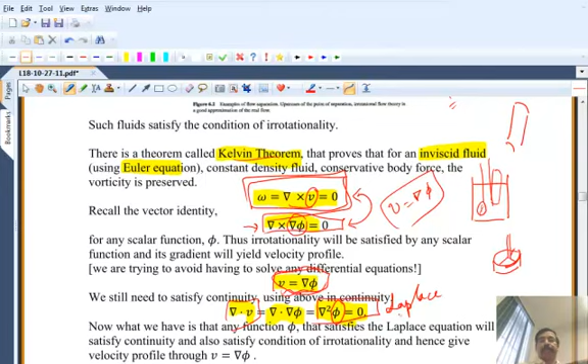So any solution that satisfies this equation, it's called the Laplace equation in mathematics. Any function that satisfies the Laplace equation will be a solution to some potential flow problem, because it will satisfy the continuity, it will satisfy the irrotationality condition. So I have simplified the problem quite a bit. Instead of solving four equations, I need to solve only one equation, a scalar equation. Okay.

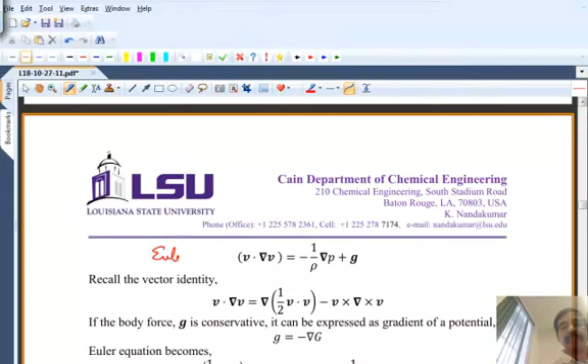The other thing is the Bernoulli equation. I think we talked about it when we were deriving the energy equation. So we start off once again with this Euler equation. Remember, Euler equation is the Navier-Stokes equation without the viscous term. Okay, mu del square v, that's dropped out. So we are going to use another vector identity, which I gave you at the very beginning when we did the review of the vector calculus. So v dot del v is equal to del 1/2 v dot v minus v cross del cross v. It's an identity that's valid for any function v.

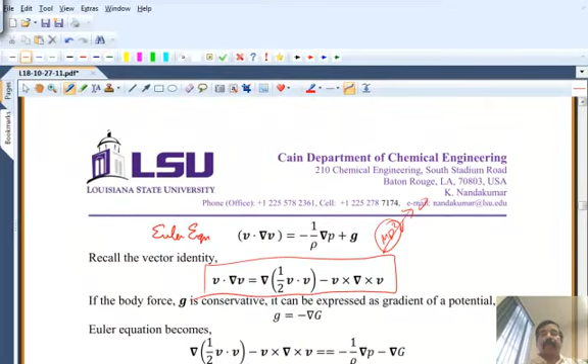And we're going to define g, the gravity, as gradient of another potential function G. So this is called the gravitational potential, which is nothing but gz. Okay, the gravity g times z. And so we take these two and put it into the Euler equation. So on the left hand side we substitute for this. On the right hand side we substitute for g with this one. Okay, and the pressure remains as it is.

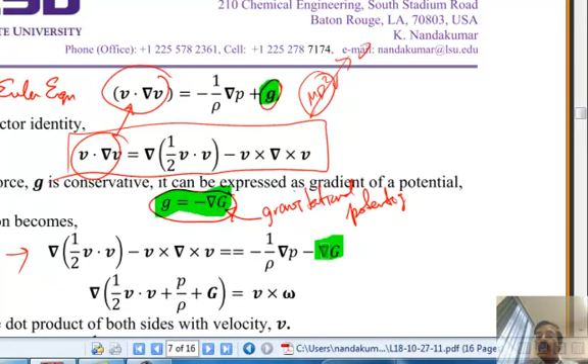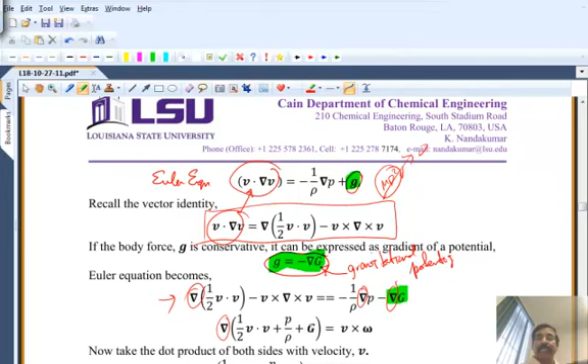And then you notice the reason we did this is we want to get everything in terms of this del operator here, the del operator here, and the del operator here. So we can combine all of them on the left hand side. Del of 1/2 v dot v plus, when it goes to the left hand side, p over rho. Rho is constant, so I can take it inside, plus G equals whatever I have left that goes to the right hand side. Okay. Now this is still a momentum equation.

So when I dot this with the velocity, dot product with the velocity, force times the velocity is the energy, the work done. Okay, so I can now dot it, and on the right hand side I immediately see that this is equal to 0. Why is this 0? Again, another vector identity. V cross omega will be a vector that's perpendicular to V. So when you dot it with V, it must be equal to 0. That tells us that this entire thing must be a constant, because this is equal to 0.

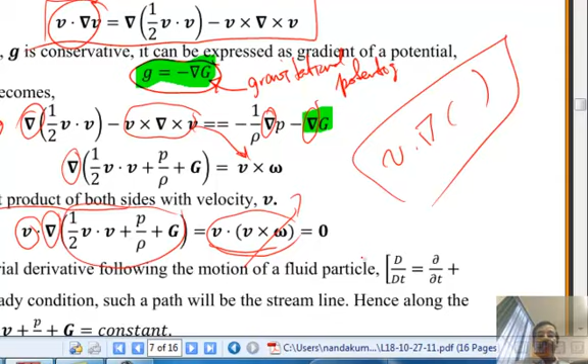When you integrate that, we have a derivative, so that must be a constant. But the integration must be done carefully. What does this operator V dot del something mean? It's the convective acceleration, Lagrangian acceleration, following the motion of a particular particle. Okay, so the integration has to be done along a streamline, because we know a particle of fluid will follow the streamline. So along a streamline, this must be a constant. And that is your Bernoulli equation. So you understand the assumptions under the Bernoulli equation. It is inviscid fluid, and along a streamline, that must be a constant.

I think maybe we will stop there and look at two-dimensional potential flows in the next lecture. Okay.